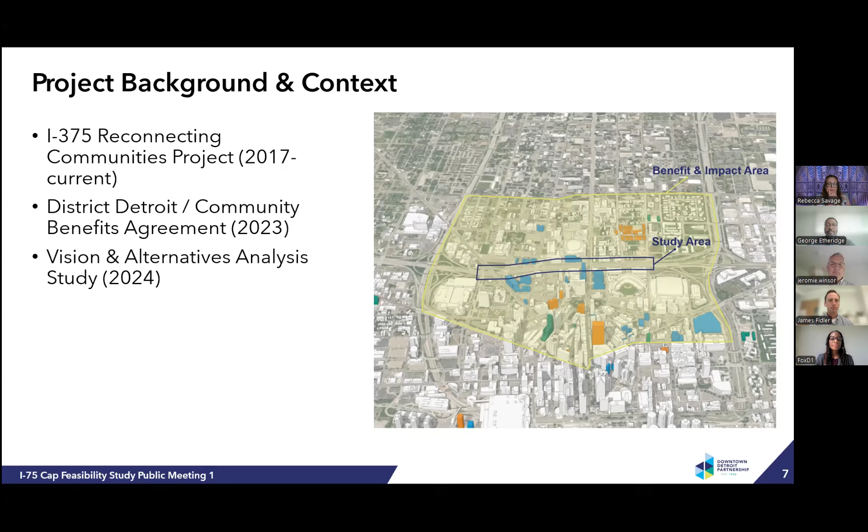And then finally, the previous phase of work I mentioned, which I'll go into more detail on, was the vision and alternatives analysis study completed in 2024, which looked at different options for capping I-75 and set some priorities and a vision for what that could look like. That vision and alternatives analysis went through a process that was very much community engagement oriented, setting goals and needs based on community input, looking at different options for how the CAPs could be built, where they could be built, and what could be on them, and then selection of a preferred option for further development into a feasibility study. My colleague Dina is going to talk more about what we want to accomplish during that feasibility study, but I'm going to talk a little bit more about what we accomplished in the vision and alternatives analysis.

So I mentioned engagement. During that time, we had three rounds of interactive public engagement meetings. Each of those, overall, had more than 200 attendees. There's some pictures down below of some of the workshopping we held at the MSU Center in Detroit, which is just north of the CAP areas.

Each round of engagement was also supplemented by digital engagement, and we got over 1,100 survey responses on things like the placement of the caps, what should go on them, and what the priorities were for reconnecting across I-75. We also engaged with a stakeholder committee of neighborhood, business, and institutional representatives from in and around the CAP area, and had a number of meetings with those groups. We had some targeted outreach as well, with small group meetings with small businesses, with seniors, and with youth from Cass Tech to get their opinions on the CAP themselves.

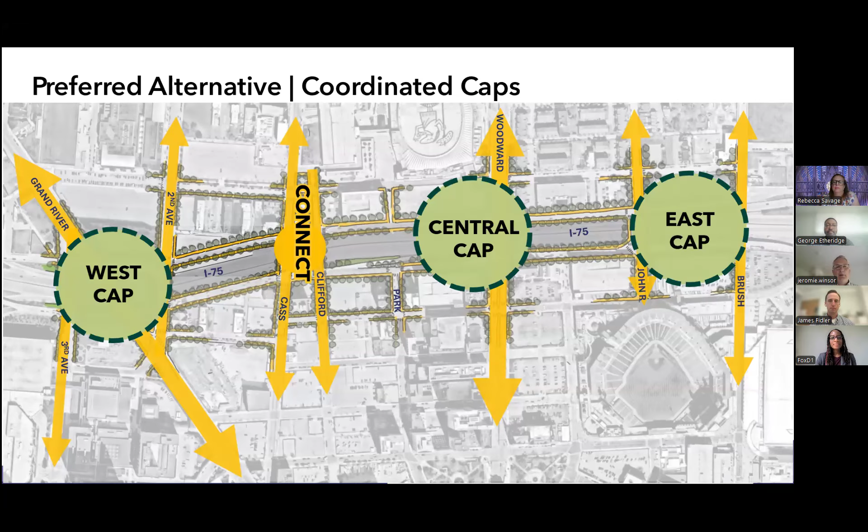The caps themselves would benefit by shielding people from the highway, reducing noise and hiding it visually. These would create green and recreational spaces with different characters — we'll talk about those in a minute — but they'd be supplemented by enhancements to the surrounding streetscape as well, enhancing safety, slower vehicle speeds, and supporting alternative modes of transportation.

So the preferred option has three different caps. An east cap representing more of a neighborhood gathering space, targeted toward the needs of the developing Brush Park neighborhood to the north. A central cap that would be more of a vibrant hub for the entertainment districts on either side of I-75 today. And a west cap meeting the daily needs of users on that western edge of downtown, which already includes Cass Tech High School students, but will soon include students from the University of Michigan Center for Innovation.

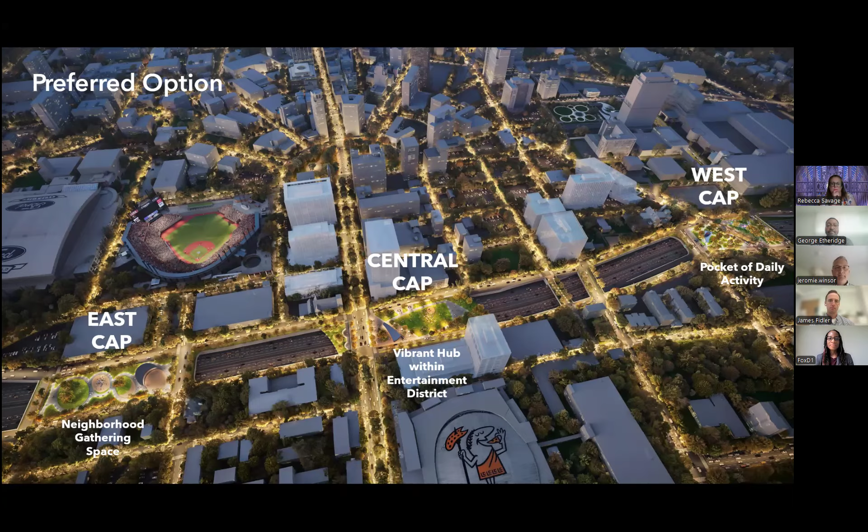The next few slides get into what those different caps could look like on the ground. We set a vision in this previous phase for the types of improvements that could be developed, but not necessarily the actual design that will be presented within those cap areas — that's something we're intending to figure out during this phase.

So the East Cap would have recreational amenities as shown here: places for children, places for dogs, recreational space for local residents.

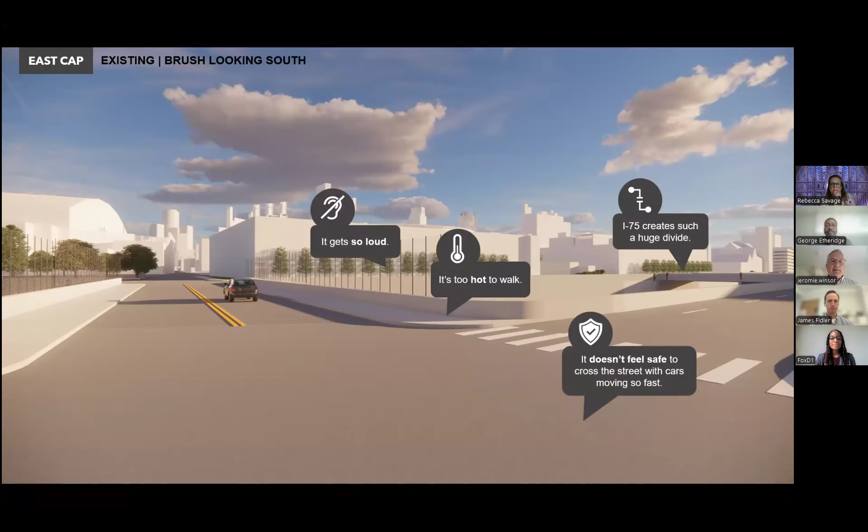The East Cap would also include some accompanying streetscape improvements, understanding that if the caps themselves were built without these accompanying improvements, the access to them might not be as desired. Right now, getting across I-75 is loud, hot, and lacks green space. But in the future, with that cap in place and accompanying improvements on adjacent streets, there would be opportunities to better connect these cap areas to the neighborhoods to the north and south.

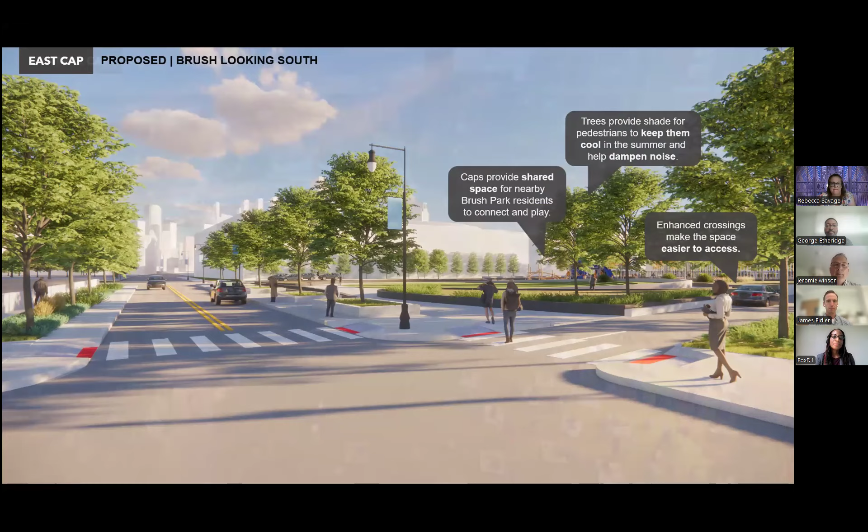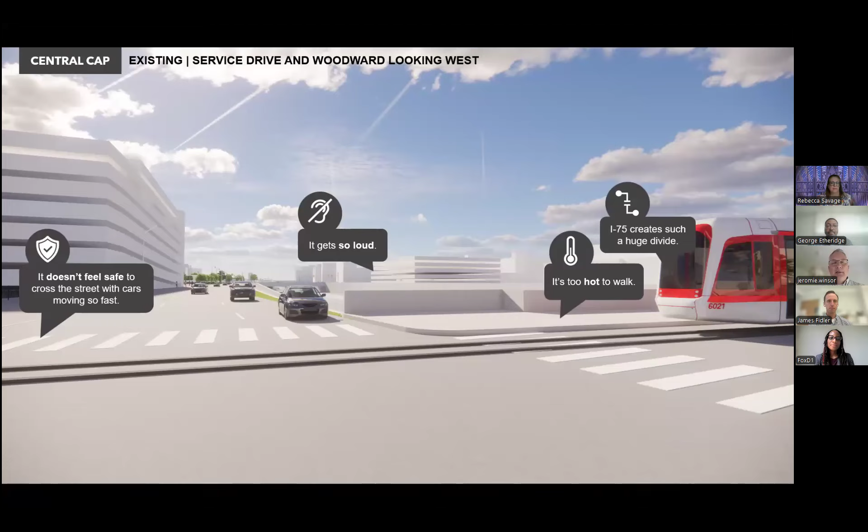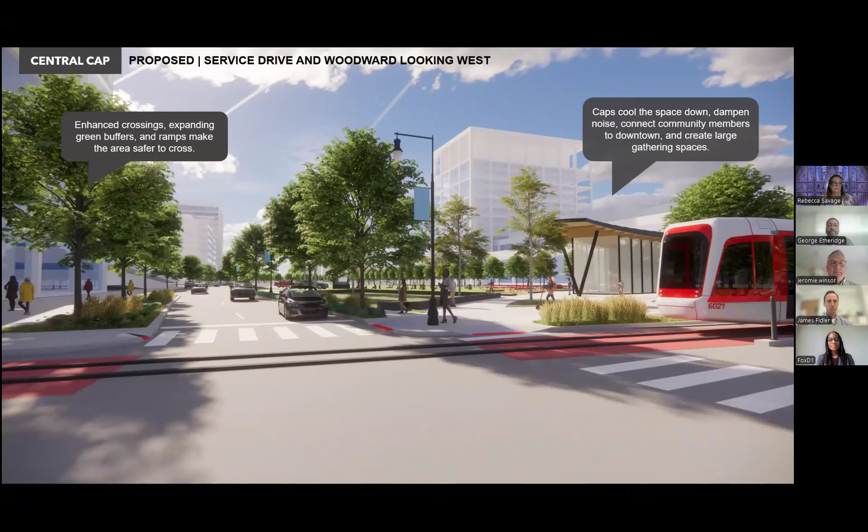The West Cap would be a pocket for daily activity from the student and other neighborhood population in and around this area. You might see in this space places for food vendors and small businesses to provide amenities to the local neighborhood that's growing in this zone.

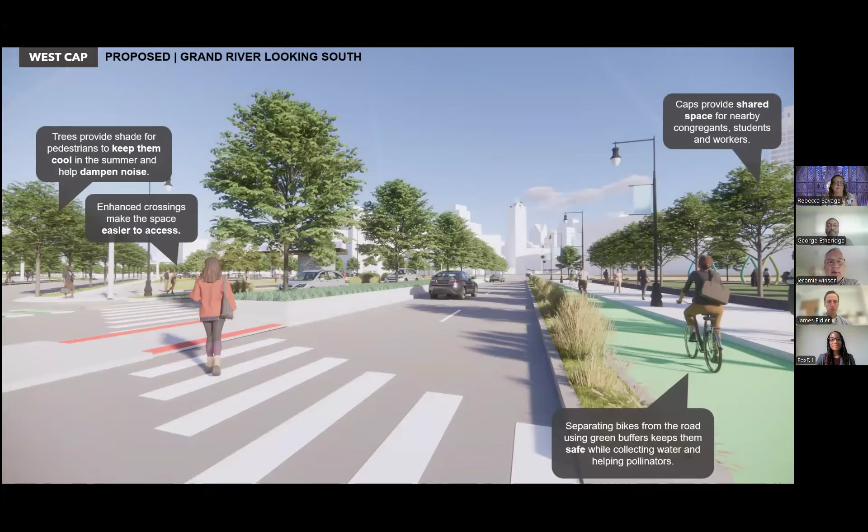And here's a view of what Grand River might look like today and what it might look like in the future, with additional green and streetscaping, some additional bicycle amenities that would reinforce the bike lane and travel along this corridor, and additional street crossings for pedestrian safety in this zone.

So that's really the vision that was set during the previous phase. I'm going to turn it over to Dina to talk about where we want to go and take this next.

Thank you very much, Jeremy. As Jeremy said, I'm Dina Fox, also with AECOM, and we are very excited about what this phase of the effort represents, because we know it will bring us significantly closer to understanding a lot of the variables required to make the caps a reality. It's important to bear in mind that the information we learn during this phase, including the feedback we receive from you, will directly inform the parameters everybody is eager to better understand, such as schedule, cost, and sequencing for the project.

So we can go to the next slide. There are four primary areas of focus for this current phase, for this scope of work we're undertaking now. We've summarized some of the timing for each, beginning with community engagement, as well as the initial stages of transportation design and engineering. Both of those work streams are mobilized in parallel and will run through the majority of the duration of this current phase of work, ending in summer of 2026.

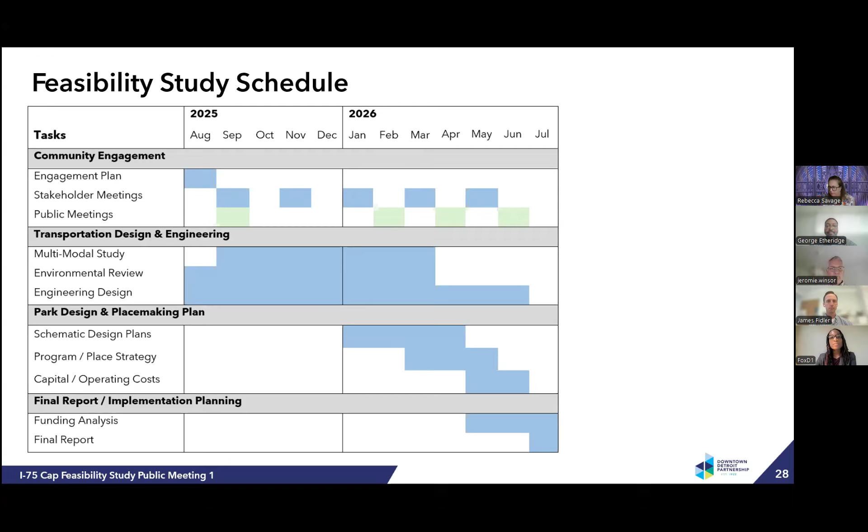So we wanted to walk through a number of the questions this phase of work is meant to help us answer. To begin with, we know there's some really important thought to be taken into consideration for specific elements on each of the park caps, as Jeremy alluded to earlier.

In addition to some of the structures and amenities, we also think it's important to be thoughtful about what programming each park will include, as well as the physical design aspects for each of the spaces. We are really trying to take an intentional approach so that each cap has its own identity, responsive to and representative of the users most likely to spend time there. That's another reason why we believe the community engagement aspects of the work are so important.

From a funding perspective, we're looking to better understand how much it will cost to build the caps, as well as how the project will meet environmental regulations for federally funded projects in particular. We also know it's very important to have a thoughtful plan around the ongoing maintenance and operations for all of the spaces involved in developing these new caps.

We're also looking to understand some questions around transportation. For example, circulation strategies for both vehicles and pedestrians, not only navigating to the caps themselves, but also navigating around them, are very important considerations for this part of the effort. We also want to make sure we're promoting access for multiple modes of transportation while also accommodating and planning for the event traffic that we know is such an important aspect of the vitality and social life in this area.

We also think it's very important to think about how the caps themselves will function during events, as well as during non-event times, and also how the bridge structure should be designed to accommodate the caps, as well as provide appropriate ventilation and drainage, which is very important for the long-term durability of the caps and cap structures. These are all things we've already initiated our investigation for, and we're looking to better understand as an outcome of the current feasibility study phase.

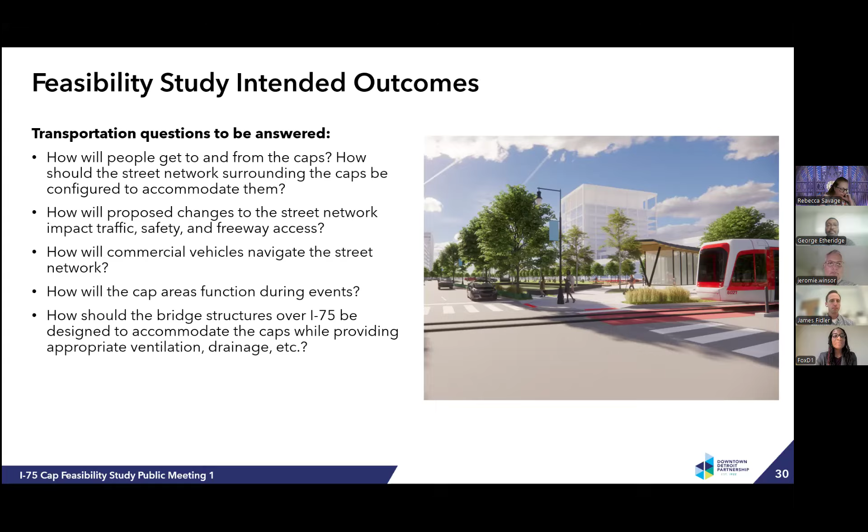So we will look forward to hearing more from you, and I am going to now hand it over to George Etheridge, who will speak about some of the opportunities to do that.

We acknowledge the Native Americans who were the first on this land. They included the Chippewa, Ottawa, and Potawatomi nations. We know that the Wyandot, Iroquois, Fox, Miami, and Sauk tribes all traveled through this area. Today's borders were not relevant to them, and we know they lived on both sides of the river.

The first European settlers here in the early 1700s allocated land for what we call ribbon farms that extended from the Detroit River northwards to about where I-94 crosses Woodward and crosses through the city. Those ribbon farms were in existence for about 100 years. The most significant were in the center next to Woodward Avenue - one was the Cass Farm, and on the east side of Woodward was the Brush Farm. We still refer to the names of those property owners today, like Brush Park. Okay, next slide.

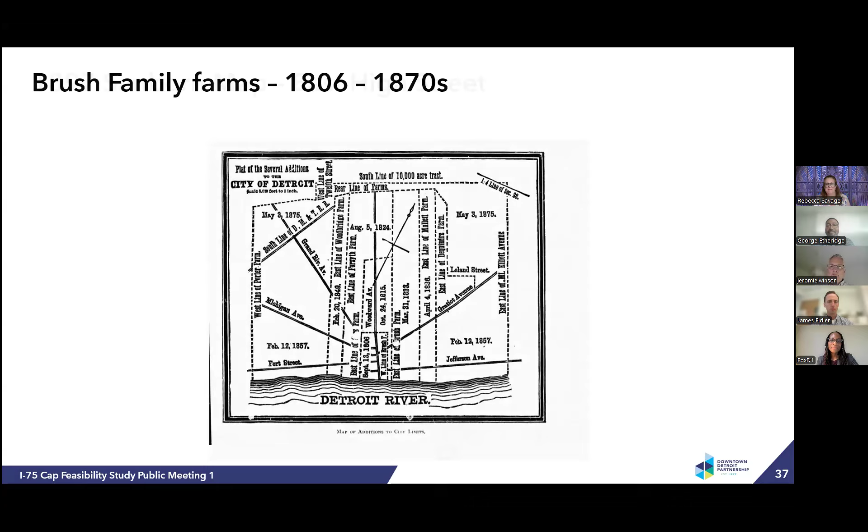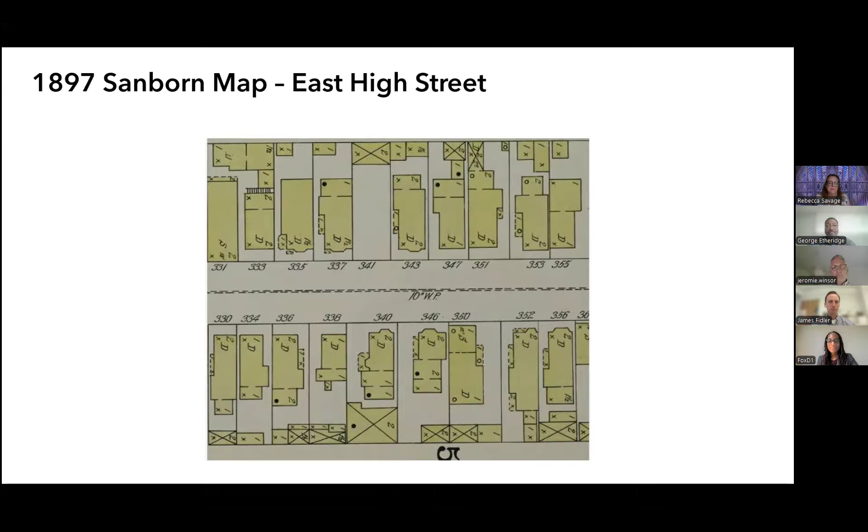As you know, by the 1920s, Detroit's population exploded, and we know that there were over 800,000 people living in the city of Detroit by 1920. So the demand for housing caused a lot of those single-family homes that I just showed you to be demolished.

They were demolished for what were called hotels, but they were really multifamily apartments. In this image, you can see West Vernor Highway at the top of the screen, and below that are the different hotels: Hotel Clayton, Hotel Olds, Royal Palm Hotel, Hotel Rex, Hotel Majestic. Today, only the Royal Palm Hotel still stands, at the right side of the screen, that blue colored building. So it was a very densely populated area at that time.

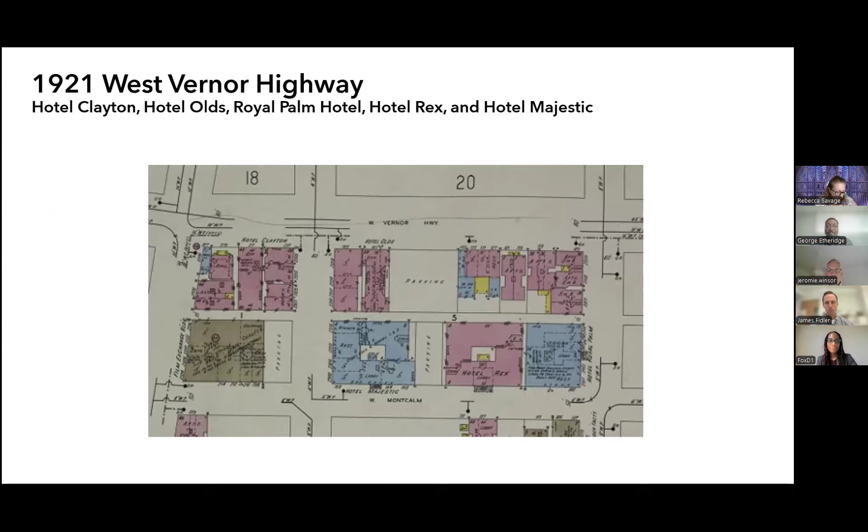One of the most famous businesses in the neighborhood was owned by Joe Louis, the boxer. His restaurant was called the Brown Bomber Chicken Shack, and we know it was very successful and a popular place.